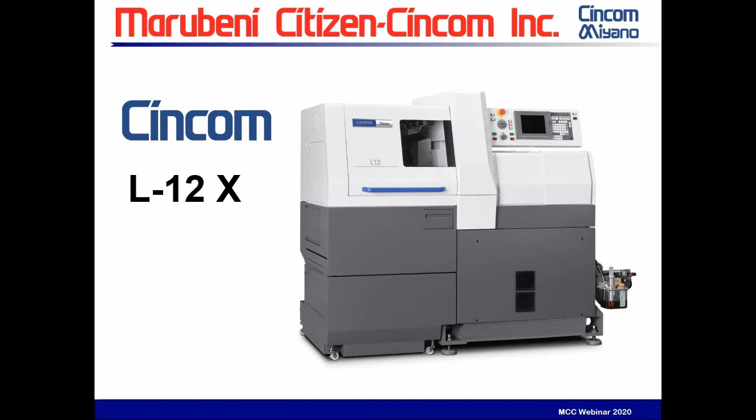We have a new model called the L12 Type X. This is the second iteration of this model. Internally, some of our people call it the L2-12 Type X, since this is the second revision of this model.

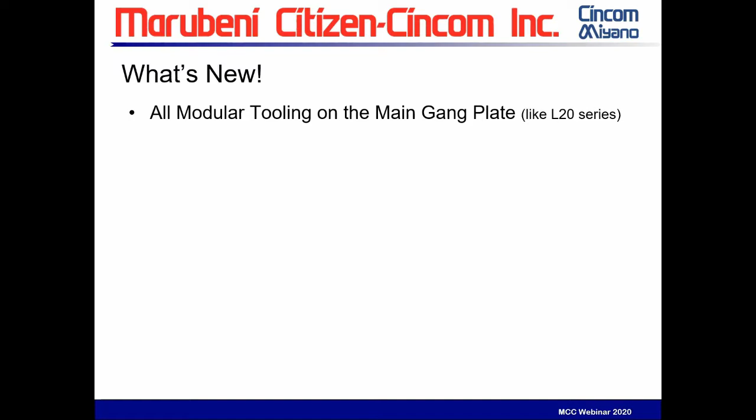So as we look into this specific model, the L12 Type X, what are some of the new things we'll be seeing today on this model?

First of all, it's a more all-modular tooling design, very similar to our L20 series. You'll see that in a lot of examples as we go.

The next major change and improvement is the addition of a Y2 axis. For those who know our products, this is actually mounted on the subspindle side, so the spindle itself moves up and down in the Y-axis. This gives us the ability for small diameter parts—a lot of customers use our L12 series for 30, 40 thousandths diameter parts, even 20 thousandths diameter parts—and we want the subspindle not just good, but perfect, maybe a tenth centered. Since we have a Y-axis, that's easy to do.

Also, the big advantage of the Y2 axis is our back tooling stations get doubled. So instead of 4 tools, we have 8 tools in the back, and we're going to show you many variances of that.

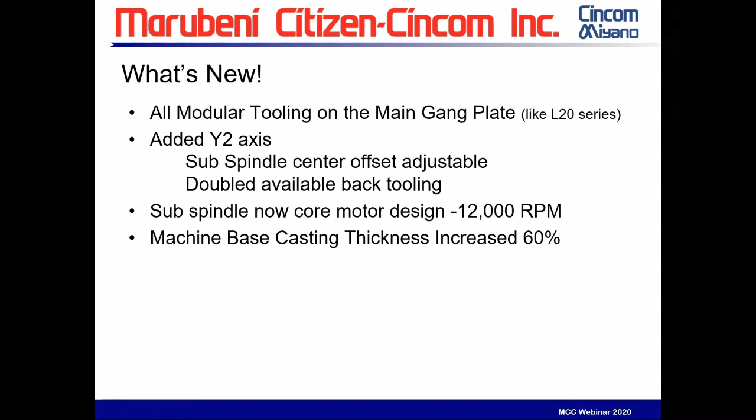On this model, there's also a newer design subspindle. It's a core motor, no belt, and it goes 12,000 RPM, a little increase from the previous model. A huge design concept is the main casting—the machine base casting is much improved, not only to hold the Y2 axis, but for overall rigidity, increased as much as 60%. We're going to show you some of this.

For those of you who have seen some of our newer products, we're always trying to make it more user-friendly. The nice door opening up gives much more room for the operator, and we really like this.

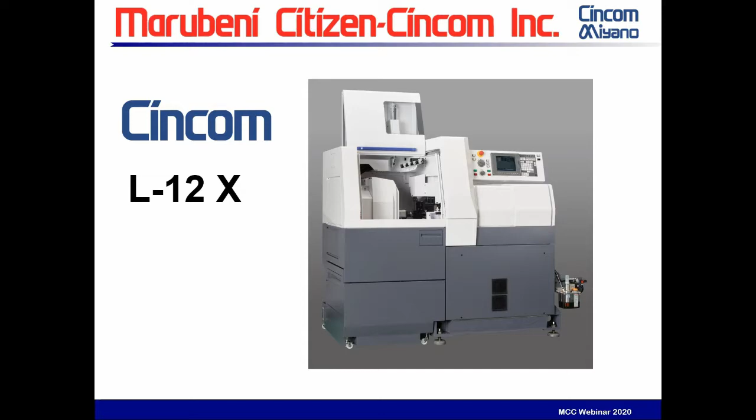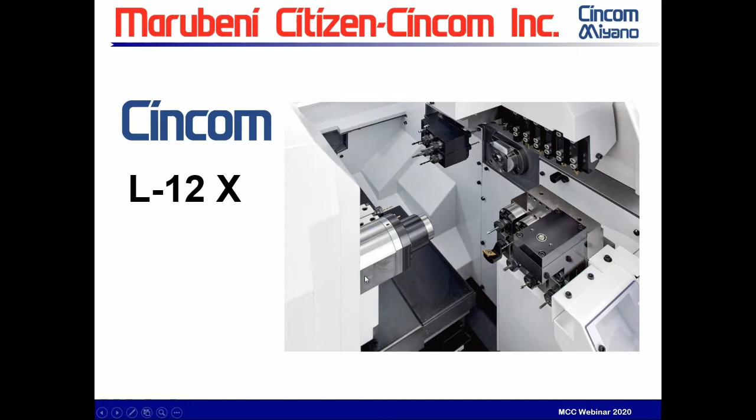So as we look at this more today, we're going to go look inside the machine. Here you can see a lot of our modular tooling we'll be covering in a minute. Here's our double stations of back working tools—there's two rows, a static row and a live row. And here's our subspindle, with the Y-axis right here. We're going to see this in a second.

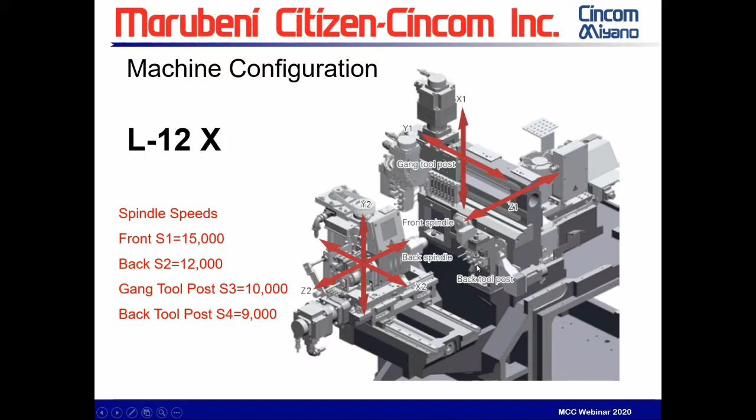The added Y2 axis is right here. Again, this gives us the ability for a perfect center when we come in and get the part from the main spindle. But it also gives us the ability to come over and work on these tool blocks, up and down and all around, with many tool options available.

If we look at regular spindle speeds: 15,000 RPM on the main, 12,000 RPM on the subspindle. We have 10,000 RPM on our gang tool live tooling for the main side, and 9,000 RPM on our back working block. We also have speeders that can plug in, 4-time speeders, some with a maximum of about 30,000 RPM. With electric air spindles, we can get up to 80,000 RPM. So many options for you.

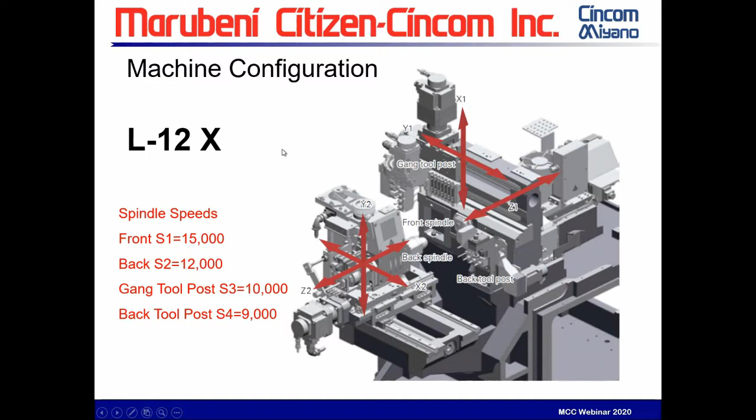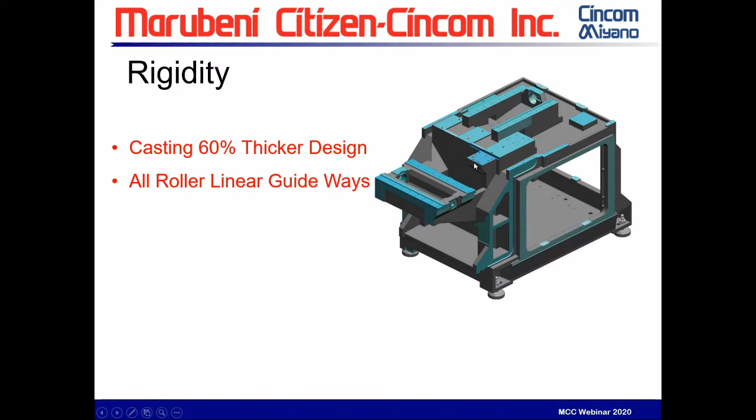Just a quick review of the rigidity increase—60% thicker casting everywhere around. And utilizing that, if you know linear guide rails throughout the machine, this machine incorporates the roller style. This picture represents it well.

Instead of a set of balls reciprocating through—if it was a set of balls, you have one point of contact on the way surface on the top and bottom, times 4. But with a roller design, you have like a 5 millimeter point of contact, times 4, much more rigid with the roller. This specific machine has roller ways throughout all axes. Just good to know.

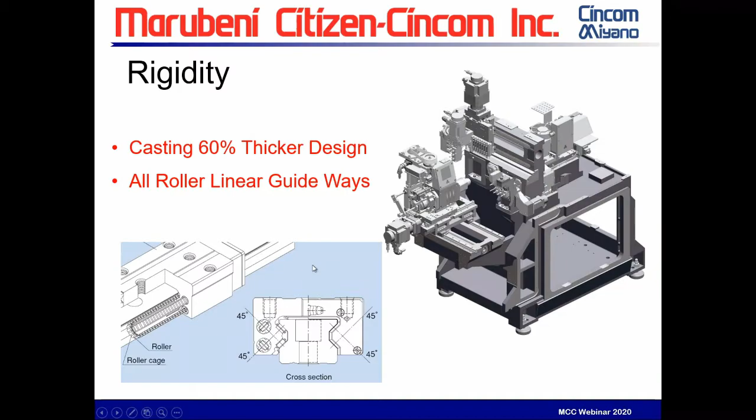If we look at some of the differences, one of the main differences is the modular tooling design. This comes from our very popular L20 series. In the first iteration of the L12, we kept it simpler, where you didn't have lots of tooling options. Now we're full blown into the L20, with many, many options available.

So if we just take a quick look, we now have 1/2-inch tooling available. This picture shows 7 - we offer 6 turning tools that are 1/2-inch, and this picture is actually 3/8 tools. So our standard is 1/2-inch.

We have one live spindle that's built in, but it's closer to the guide bushing with a smaller collet for any special work you need on small diameter parts. Otherwise, we have modular tooling stations and an adjustable tool station.

Like the L series, we have the ability to go from 0 to 90 and anywhere in between, and we have simple G-code software that lets us program parts at an angle if needed. This is going to be fixed at the angle you choose - the angle is not programmable. You set the tool, then you run. But we have all of this as standard on this new model.

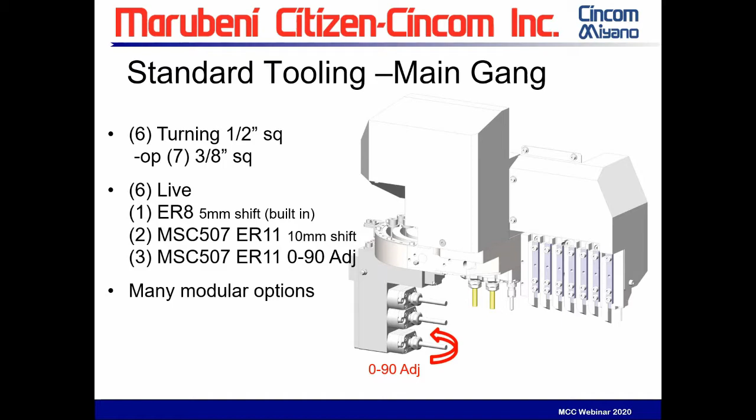If we go a little bit further and look at the tooling on the rest of the machine, next to the subspindle is what we might call deep hole drilling - 2 static stations, these are not live. And this is the Y2 axis, so these are perfectly adjustable through programming. These are 3/4 round, and we have all different sleeve options available here.

We call these the T20 stations, those of you that know our system. On the back side now, a little bit of a blow up, we have 8 stations. The bottom row is static and the upper row is live, and we're going to show you the many options in a moment.

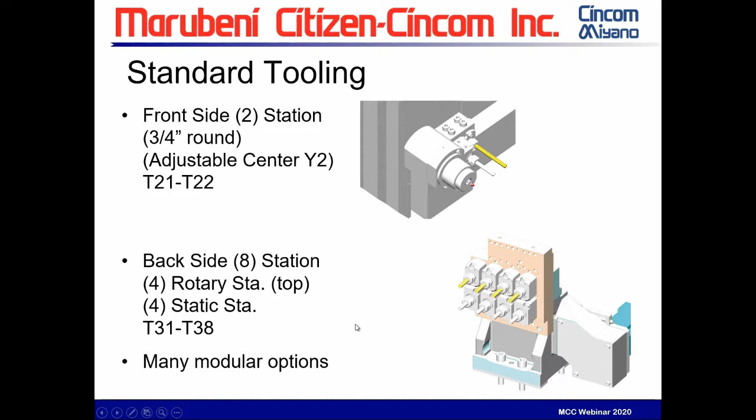So what you get standard from MCC with the purchase - as Citizen has done this for some time now - we virtually have 2 styles of live spindle: the smaller, the 16 millimeter and 12, and the larger 20 and 32. This modular live tool can unbolt, and we can put it in the back here. We can take any of these and put them here.

So we give you 7 live spindles. If you did this picture standard, you might have these 2 modular and these 3, so you might have 5 and 2 here, so these stations would be empty. But now if a different job comes that you need it in the back and you don't need them all in the front, you can take them from here and just put them in the back. So these are all movable, modular.

And if you did get a 3-time speeder or a 4-time speeder, it can fit in all these different stations. It's a fantastic system. We also give you 7 of those tools. Now we also give you 8 sleeve adapters - these are the bottom row here that are holding drill sleeves, and we give you 8 drill sleeves.

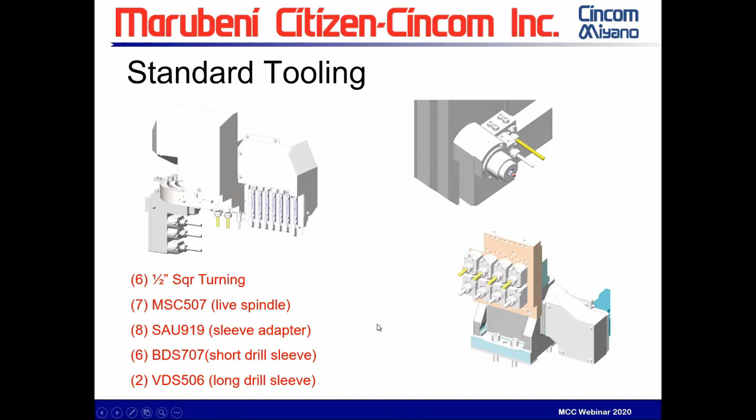So if you had a different job that didn't need all the live, we give you enough to have 8 static tools here, or you can take these same sleeves and put them here. So you can move them all around, but we give you 8 static stations available. So the standard machine gives you much tooling, and of course, we have the ability to do more.

So now what else do you desire? In this case, this is the block we just talked about, but here's an addition. We have an additional block that will give you 3 front and 3 back and a 0 to 30 degree angle. So now we have the ability to have 3 angle tools here and 3 more set at another angle. Very creative.

If we opt out of that, we can put in its place a 3-position fixed straight live, 3 front, 3 back, not adjustable. But if we put that block in and use the creative toolings, use this block set off to the side, fixed, now we have live tooling that can bolt in, and now we have 3, 4, 5, 6, 7 front live, 7 back live, all by just modular tool holders.

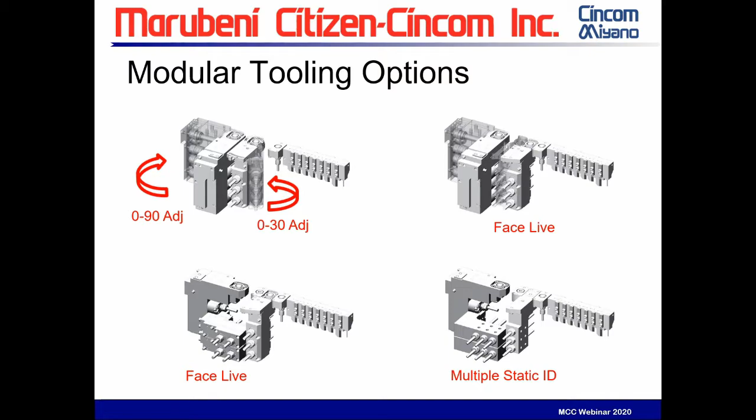If you don't need them all live, we can go here, and here's static tooling. It's the same looking, but these are static. So here's 9 front static with 9 back static. So basically, most any parts you have, we have tooling that can cover your needs.

Now, as time goes on, there's always a need for one more of something, but now we look at the backside. All different modular toolings available for the backside, including cross live or even slotting. We can put these in different stations, anything that you need, and because of the Y2 axis, we're able to hit all these tools.

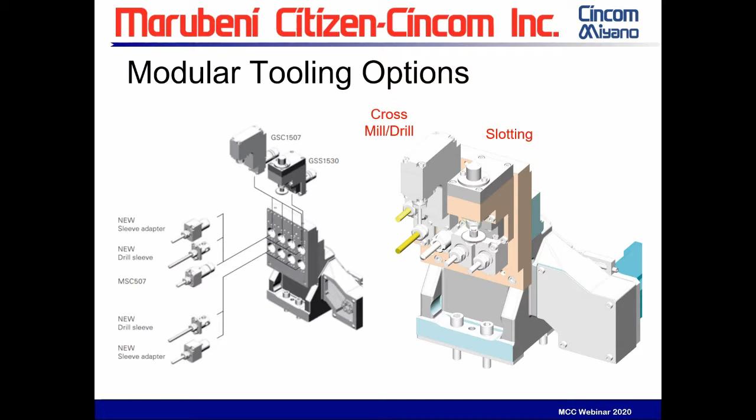Now, if all of that's not enough, sometimes customers have a need for more. Without trying to go to the next machine that might cost a lot more money, we have a lot of customers come to us asking, can you make us a special? So our MCC design special tooling from Tooling and Accessories.

We had a customer who needed this, and we found that if the bottom row is static and the upper row is live, we could design a tandem block. It's powered with the live spindle, and there's gearing inside, not a belt, so when this one spins forward, this one also spins forward, and we can double the live tooling. This is just one idea of a special that we made, and it's now a standard.

This was made for our L20, but it actually fits the L12 as well. So basically, if you need any special tooling, please talk to our people, we can make it. If you'd like to see some of the other things we've done, not everything but some, go to our website, marucit.com, and off the top menu hit Products, then Accessories and Tooling, and you can download a catalog of all our different specials.

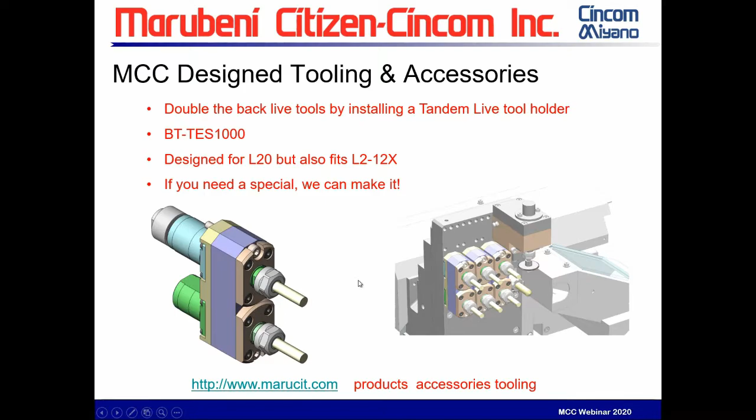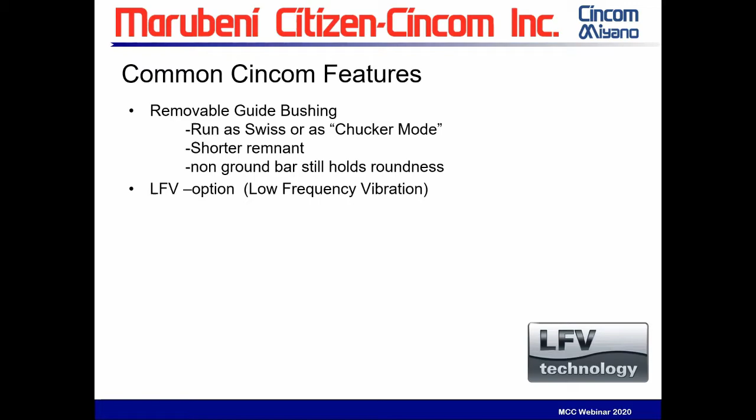So if we look at the next things about this new model, really these next features are all common to all of our new Cincom products. All of our machines now offer removable guide bushing. The L12 Type X is the same; we can run it as a Swiss or as chucker mode.

Now, I don't like to use the word chucker mode. I would say non-guide bushing, because we don't typically hand load, but the industry has taken the name chucker mode, so I put it in here.

But what do you get when you run non-guide bushing? Well, you can get a shorter remnant, and you don't need ground bars to hold roundness. We're going to turn and machine as round as the spindle bearings are. On a Swiss, depending on how tight you tighten the guide bushing and the properties of the material in it, you have the ability to have some error in roundness. So when you run non-ground bar in chucker mode, we have the best roundness available.

We also have LFV available for all of our equipment now. It is an option, but we have it available. We have air purge for spindles, guide bushing, and live tooling. So we put positive air pressure into all spindle systems to keep any contaminants and possibly water-soluble coolant out.

We also have, I think more and more people are learning about this, a 16 millimeter upgrade kit, so we can oversize the 12 millimeter to 16 millimeter. A lot of you might say, well, I don't need that. But there's actually some need, since some people really like third-party tooling systems. One of them is a Masa chuck system, and they don't make that in the smaller series machine. So if we buy this 16 millimeter upgrade system, then we can hold the Masa system in our L12.

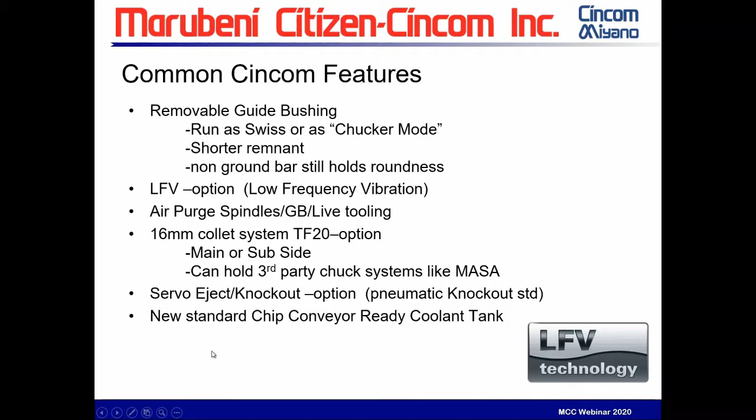We also have some changes to the chip conveyor coolant tank, not the chip conveyor itself, but the coolant tank that we supply with the machine. Any of our newer models, this is, say for example, normal. But what we do is pre-purchase and set up for the United States the ability to be ready for a chip conveyor. In the past, if customers had to purchase a chip conveyor, we had to take out the coolant tank, basically throw it away and bring in a new one, and you're paying for it again. Now the coolant tank is standard.

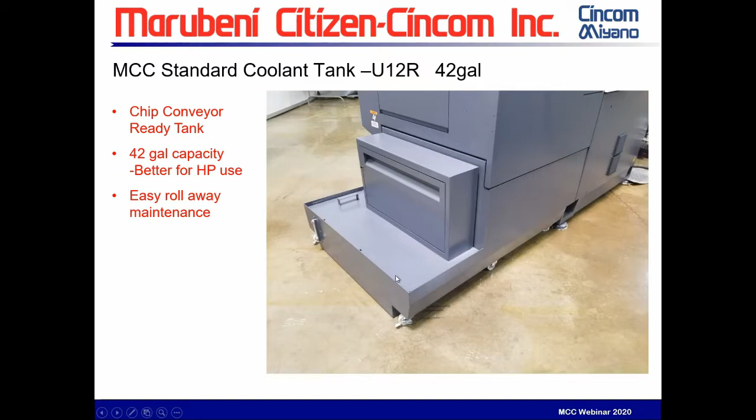The added benefit that many of our users desire is to get more coolant capacity for thermal purposes and for high pressure use, so the oil can get the air out before we pump it again. For aeration issues, the more oil, the better. So this is our standard coolant tank. It's actually 42 gallons on this little 12 millimeter model, easy to roll in and out, and just a standard feature.

We have whole presentations on LFV, low frequency vibration. Ask your dealer and they can get you links to some of our presentations we've already done. In short, our low frequency vibration is a fantastic feature for chip breaking. We introduced this in 2014 at IMTS.

There are 3 different modes of use, one of them being even for threading. Basically our axis will oscillate in perfect timing with the spindle to make a little air gap and break chips. These charts show how we produce an air gap in perfect timing with the spindle, phasing almost like a threading operation while we're turning.

Some of our competitors have something similar and they have different creative names for it, but this is all patented by Citizen. Not only are we doing this in turning straight, grooving, or facing, but when we're at an angle, we're oscillating at an angle. When we do a radius, we're oscillating on the radius. And when we're doing a thread, we're oscillating on a thread. Nobody else has this 2-axis chip breaking technology.

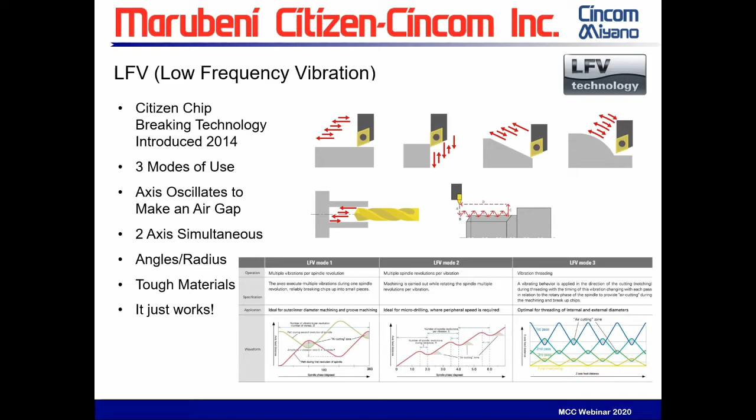So, angles and radiuses, tough materials. A lot of people can't believe how well it does on plastics. Plastics cut easy, but it's always hard to break the chips and get your process under control. LFV is a great solution for this, and the bottom line is it just works. If we take a real quick look - LFV, no LFV, LFV - it gives us a controlled process.

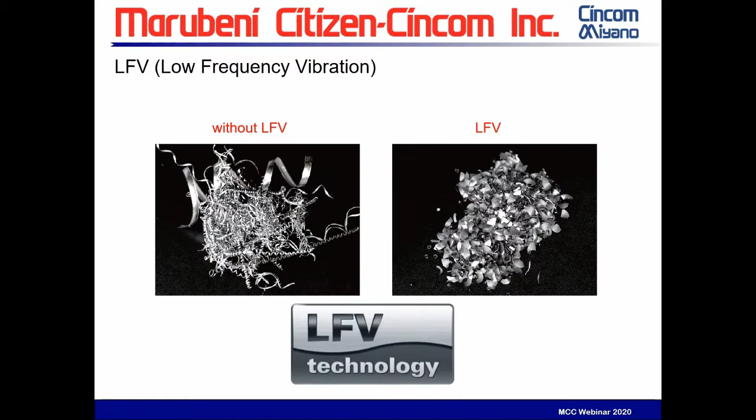Today we're really here to see the L12 Type X, and here we have a video from Citizen that as it goes, I'll explain some of the features.

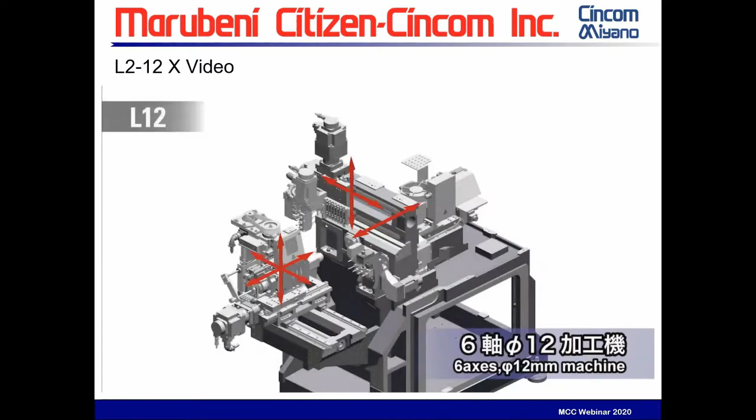So the new L12, the new feature we've already reviewed is the Y2 axis. We added all roller guideways here, things to remember. 60% increase in the casting size.

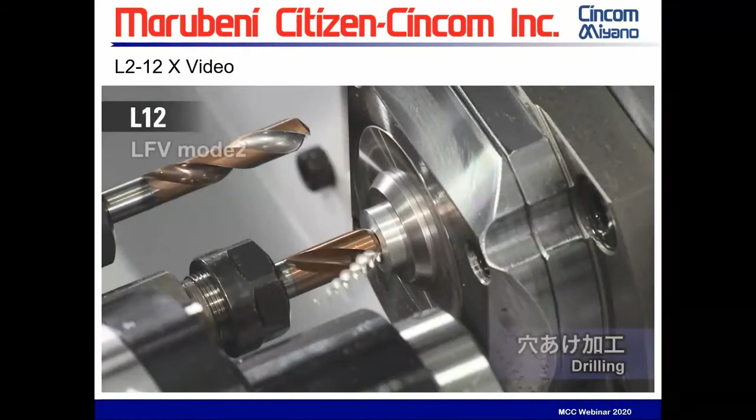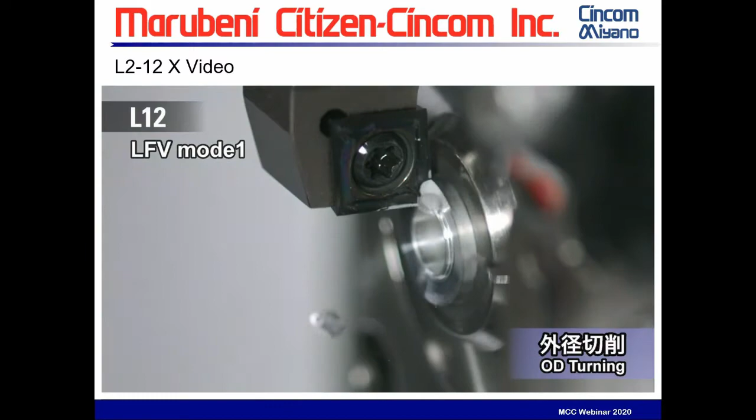Here we're going right into an example, look at that LFV breaking chips, even in aluminum - it's one of the harder ones to break chips when you do heavy cuts. Look at the depth of cut here, and LFV just working away, breaking chips, making a good process to keep it under control. Any machine can cut aluminum, but when it all wraps around and other tools take away all the coolant, or when the subspindle comes in or other processes come in to hit all the chips, having full control with LFV matters.

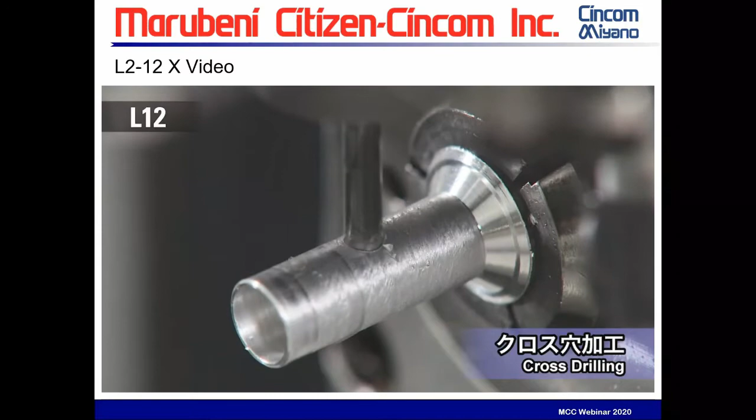This example is also showing an optional feature of 3D chamfering. Here they have these toolings set at an angle, as we explained you could do, and they're drilling and tapping at an angle.

As LFV mode continues, of course X-axis mode 1, multiple oscillations per revolution. Look at those chips breaking in an X-axis motion. Just a wonderful technology that Citizen has provided for us.

In their process they're not running coolant, so they're a little bit slow. The Japanese videos are typically a little slower, but by all means we can run faster. It's all whatever you need for your tooling and your materials.

Another great look at LFV - you can see how stringy that would have been otherwise.

For regular milling, we have direct axis, C-axis, so we don't have to stop and go home. We'll show you that a little bit more in a second on the Cincom features.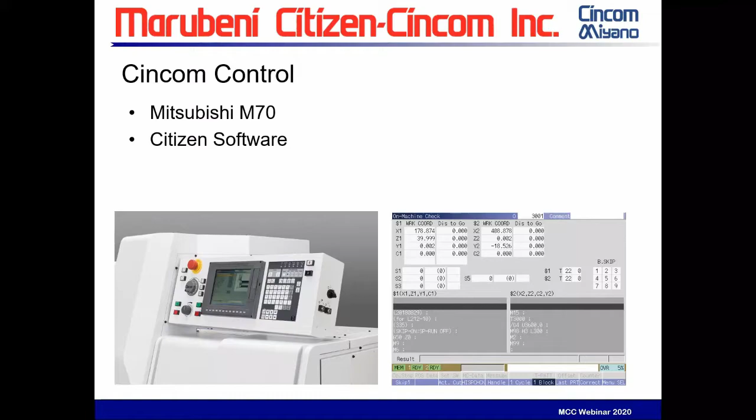As we go and see a machine run and some of its capabilities, we have to take a minute and talk about Cincom control. This is unique to Citizen. We use a Mitsubishi control. Some others do, but whether it's Fanuc or Mitsubishi, I'd say high 90s percent of it is basically all Citizen software running on all of our machines. This gives us the ability to do whatever we want.

Many years ago, our first control was actually a Yasnac L16 — I'm talking the 80s, aging myself, but it was so revolutionary that it was different. What we found is if we stick with one big control builder, once they come up with a new option, all the competitors have it too, and there's no real separation. By making our own software, we have 100% Citizen technology, plus added features like LFV and others. On the L12 control specifically, we have USB standard, SD card standard, Ethernet file I/O, and RS-232, all standard. For huge programs, we're able to run directly off the SD card, and it's easy to do.

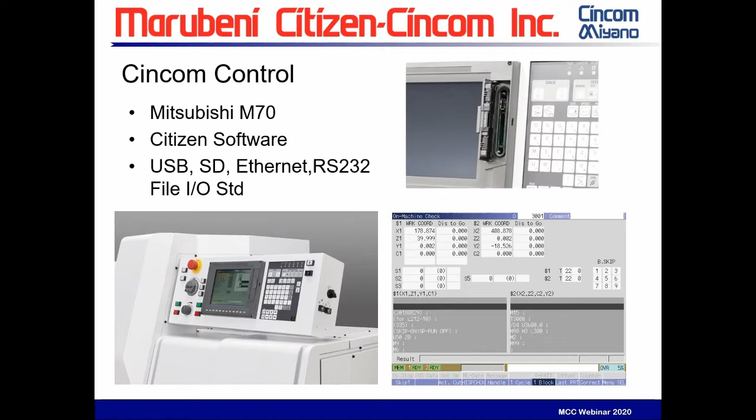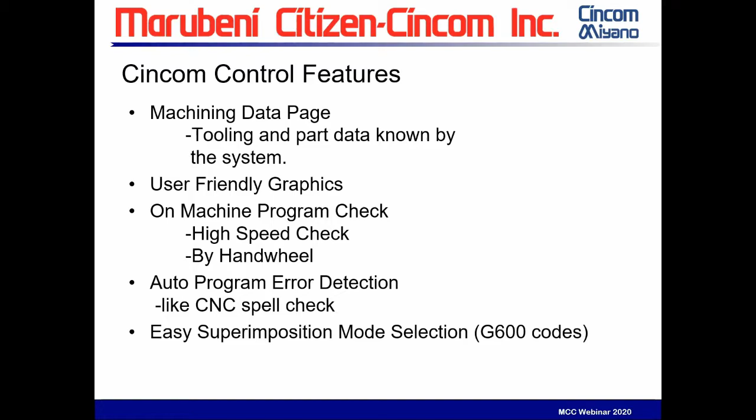Looking more into Cincom control features, there's the ability to have machining data — information about the part so that when the machine runs, it knows things, like the stock size. If we set tooling on a gang plate, in a perfect world all tools are set evenly, but often some tools stick down lower than others. On Cincom, it knows all of this and can actually go up higher for that tool and around it. It knows where the bar stock is. I showed you pictures of drill blocks hanging down — it's smart enough to know that tool holder is in the machine and will go up over it automatically. All the operator is doing is saying T1100, T300. So the adoption of machining data is a key feature of Cincom.

Please work with your salespeople to understand machining data better if you need to.

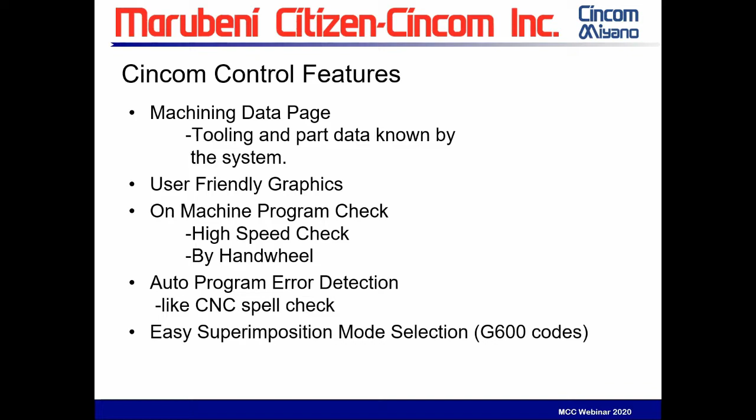User-friendly graphics — Citizen's known for this, and all the screens offer easy choices when operators have to move the machine or edit programs. On-machine program check is a key feature from way back, even in the 80s and 90s, and we're going to show you this in detail with high-speed check and hand wheel running. We also have auto program error detection — it's kind of like a CNC spell check, and we'll show you some of this. We're also very famous and known for our superimposition and our G600 codes. These are all common features of Cincom control.

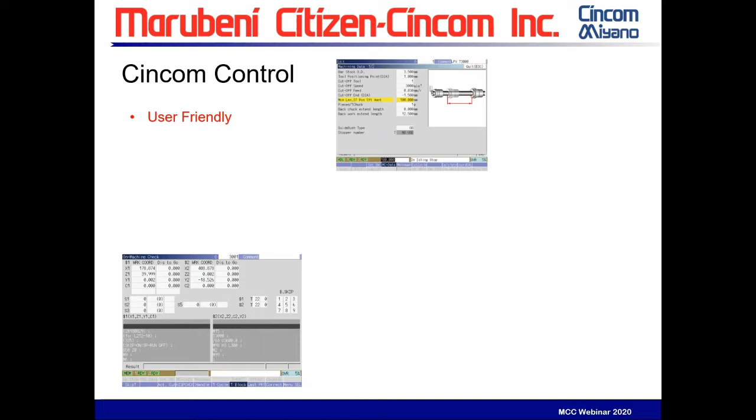Looking a bit more into this — the first is user-friendly. This is a picture of machining data, and as you enter the values, it actually shows you what you're entering as you go. Very simple.

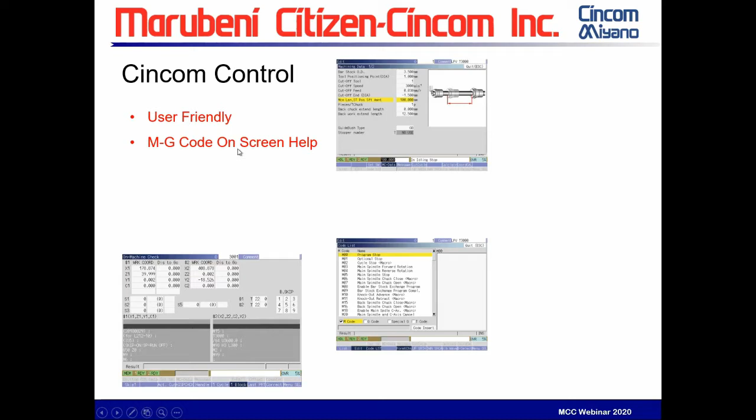As somebody's out at the machine — most people don't program at the machine, but if you're editing and adding something, you might know what the M code or G code is but not remember exactly how to use it or what options it has. Well, right at the machine, we can search the M code or G code, and it will show what options it has and how you're going to utilize that code. You can then paste it into your program with all the basics, and you just fill in the blanks. It's a very good on-screen M&G code help file system.

The L12 Type 7 is so popular and good at what it does, and a lot of people didn't want all the other bells and whistles, that it's not planning on changing and it's not planning on going away. It is the current model, L12 Type 7, and it will continue to be sold and supported.

This new model is an L2-12 Type 10, so there will not be an L2-12 Type 7. It will be the current Type 7 and the Type 10. So that should just answer the question.

This next feature is auto CNC code syntax checking, what I call a spell checker. When somebody is typing codes into the machine and fat-fingers it, or has dyslexia and enters codes backwards, it will instantly turn red for the person entering the code. It's an instant CNC spell checker that warns you—a fantastic standard feature of Cincom Control.

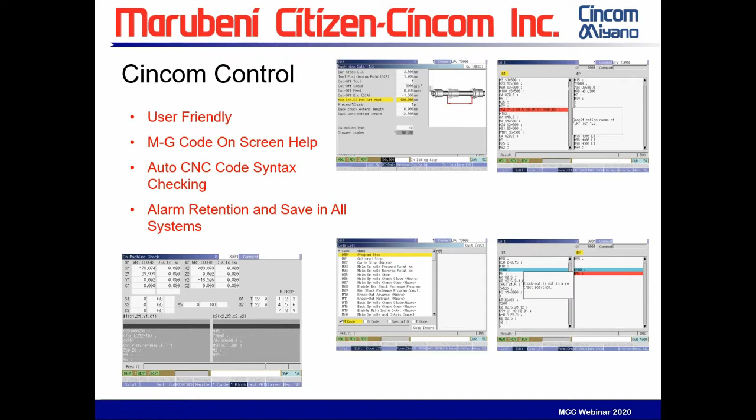When the next person comes in, if you go to edit mode, the screen will actually show you the location of the last errors and what the error was, on both systems. This is very powerful alarm retention and save, helping whoever supports the machine afterward know what happened and where, without having to run three or six minutes just to find the error again—a great feature of Cincom Control.

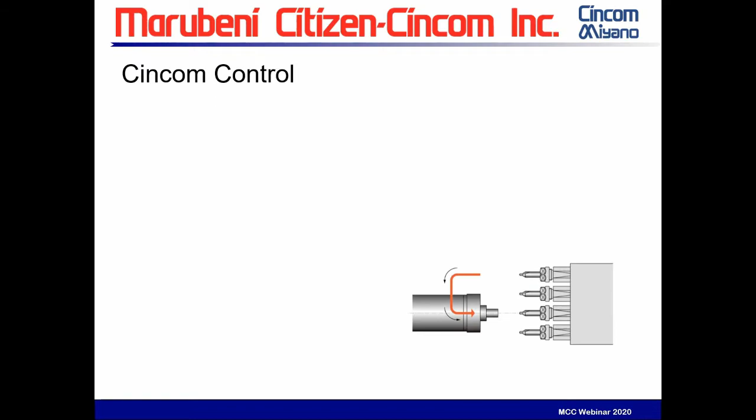These are just some of the many features I'm highlighting. Next, a lot of people don't understand that when we call up a tool or change modes, Citizen works deep inside the system—instead of rapiding back, stopping, rapiding over, stopping, and rapiding in to get the next tool change, it will actually round the corners, away from any cutting, so you won't even see it happen.

What does that do? It makes for a much smoother, less vibrating machine, and it actually gets there faster. It might only save 0.2 or 0.3 seconds, but if every tool change and every motion saves that, and we add up 1 or 2 seconds by the end of the program, we're saving real time.

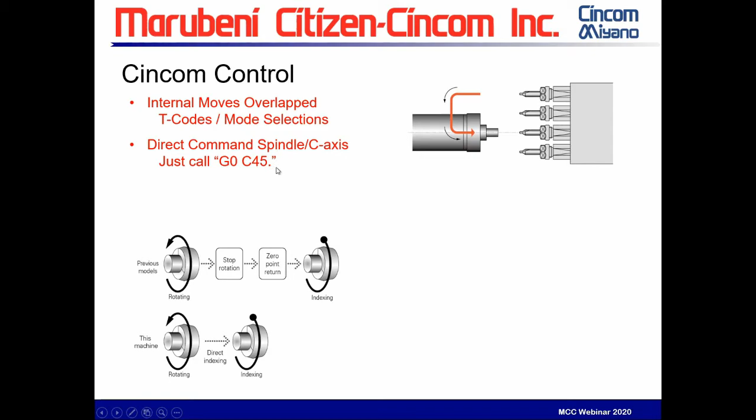The next major thing Citizen has done for a long time is part of Cincom Control: direct spindle C-axis. We can be at 10,000 RPM without stopping the spindle, engaging the C-axis, telling it to go to 0, then to 45 degrees. If we were previously running at 10,000 RPM, our code would simply say G0 C45. This might save 0.4 seconds each time it's used, but since you're running it every day, every job, you're saving a lot of time—some customers run millions of parts, so this could add up to a week's production.

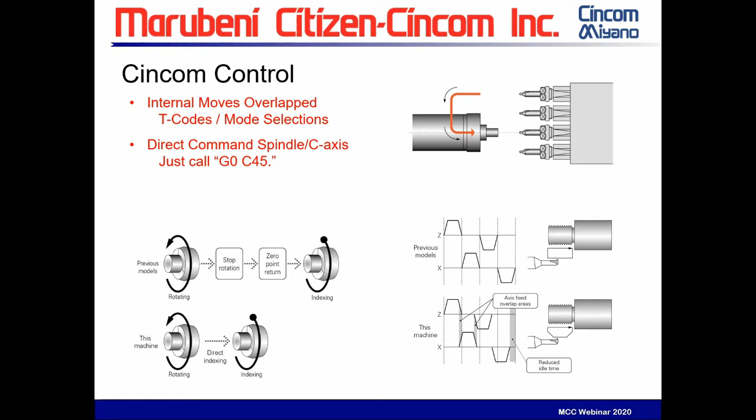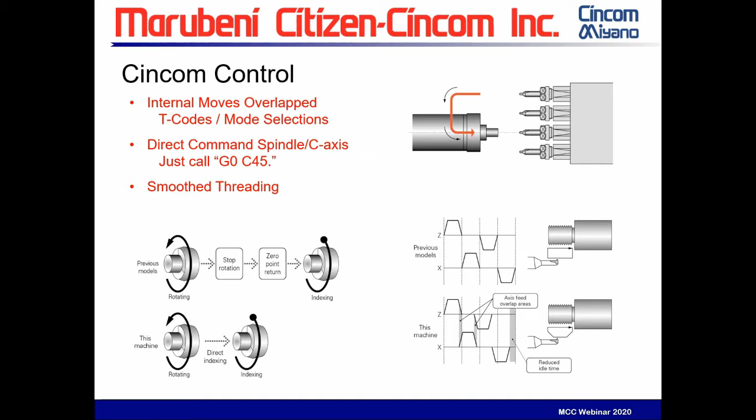The next feature, similar to the tool change motion, is threading. For threading we need a controlled move that has to be perfect, but after the thread is done there's a rapid, and another rapid before threading again—and this rapid stopping in short distances makes machines shake and vibrate. So we round the corners: we keep that perfect thread, but round the corner getting back to it. We call this shock absorber control. It makes for a very smooth thread and saves cycle time—saving 0.1 or 0.2 seconds per threading pass adds up to seconds for the user, which is money in the owner's pocket.

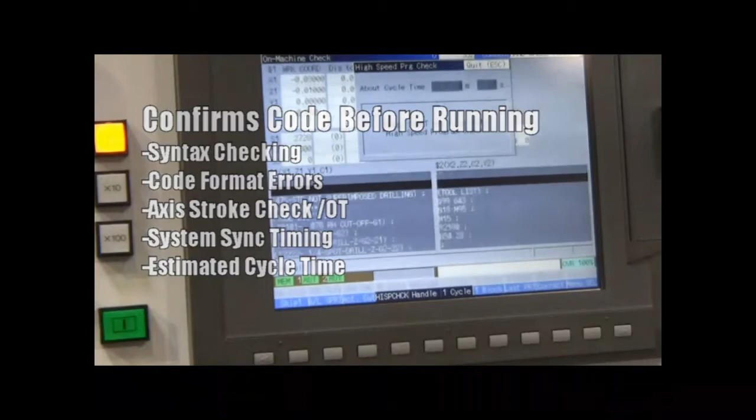Here's the first part, high-speed check. Any program we make, we can just push a button and run it. It gives us a starting cycle time, but it also does syntax checking, code errors, checks for axis over travels and timings. Basically the whole program is reviewed.

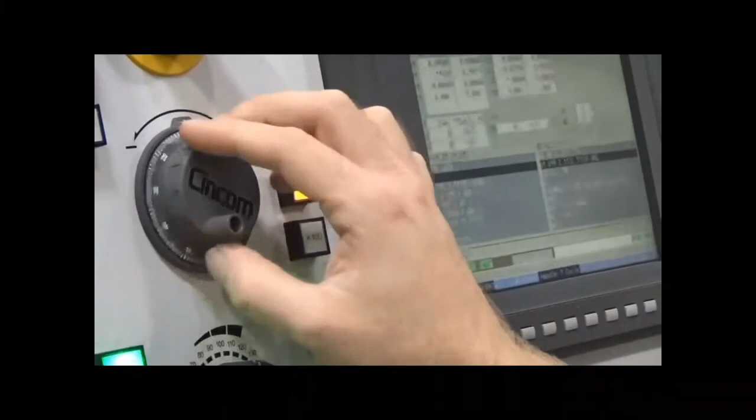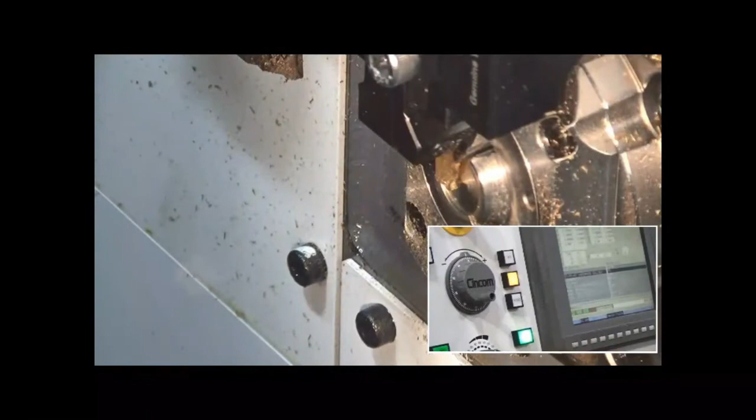Once we pass that check, it doesn't mean it's a good program. You could still have bad code that can crash. So now we have the ability to run the machine at our desired speed. This is an L12 type 10 that we put a superimposition feature in, and we're actually going to center drill and drill as we're turning.

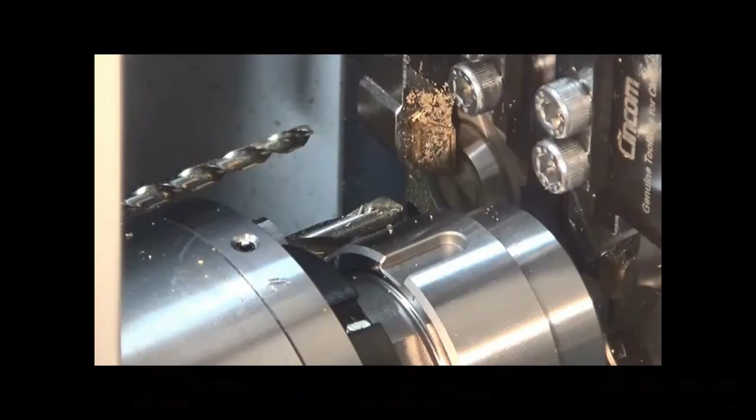The ability for that tool to come in is scary, so look how you can control it. When you need to, you just slow down, and you can bring it in under your control. Our timing isn't perfect on the hand wheel in this video, but you can see the idea.

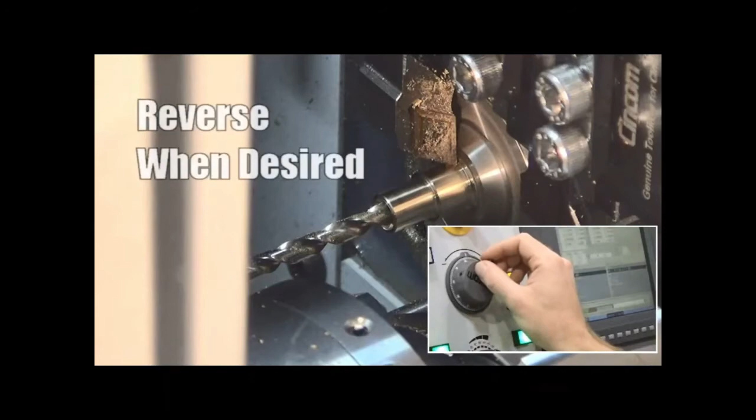We can process to the next tool at my own comfortable speed and continue on. Now if we get somewhere and think, I'm not sure about what's coming next, or I need to check that drill, we can actually run the machine backwards all the way to the previous tool call and then go forward again. Again, live edits anywhere desired in the middle of the program. So that's Cincom Control's on-machine program check.

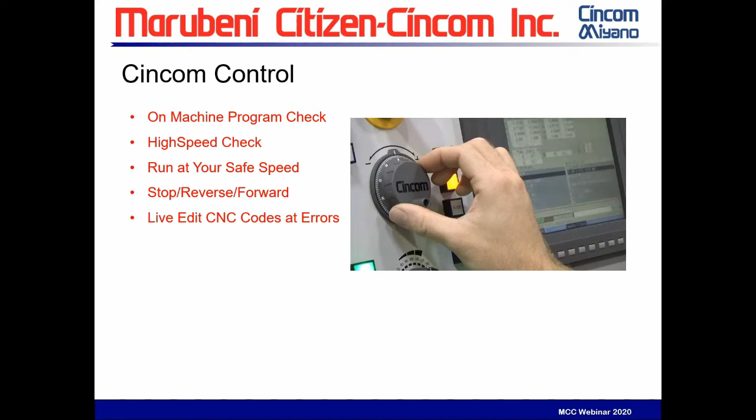I hope we have a lot of customers watching currently. When we talk to customers, unfortunately some operators and programmers get thrown into these systems, maybe coming from other equipment. I would encourage everybody to read the manuals. Not everybody does, and there are lots of people who don't know their machine has this capability. We've had this all the way back into the 90s. So please, if you have other Cincom machines, look it up. You'll really enjoy this feature.

Before I continue on here, Joe, any questions? So far, so good, Brian. Okay, thank you.

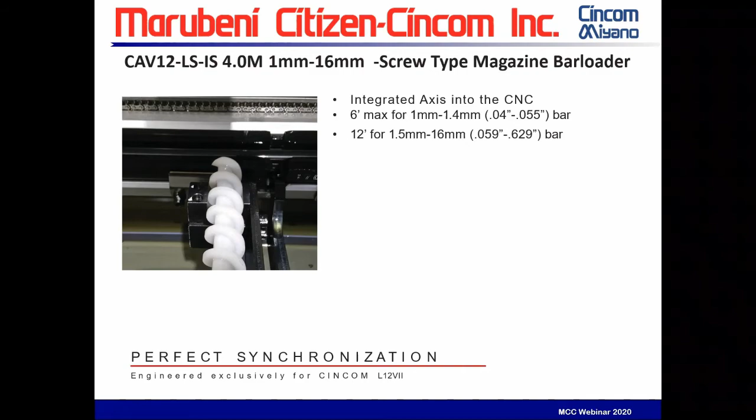As we got past our machine concept and went through Cincom Control, we have all different things to review and all different bar feed possibilities. We offer the CAV12, and with this CAV12, we had more and more customers desire small diameter running with a magazine loader at 1/16th, or even 40 thousandths, 1 millimeter.

Anytime you run smaller bars, typically if you can get them in there, you can be okay and get around it. But the way to get the bar from the magazine into the channel is always the issue with small bar. So we've adopted a screw type system that allows us to perfectly move the bars down the screws. This picture isn't showing them all, but you'd have up to 24 different bars ready, and every time a bar is needed, this rotates one revolution and one bar drops into the channel.

We have a couple different channel sizes. When running smaller stock up to 55 thousandths, 40 to 55, so under 1.5 millimeters, we go to 6-foot bars. But anything larger, 1.5 millimeter and larger, we go to full 12-foot bars. Standard with the machine when we sell it is a 13 millimeter or 1/2 inch, and 7 millimeter, basically a little bit bigger than 1/4 inch.

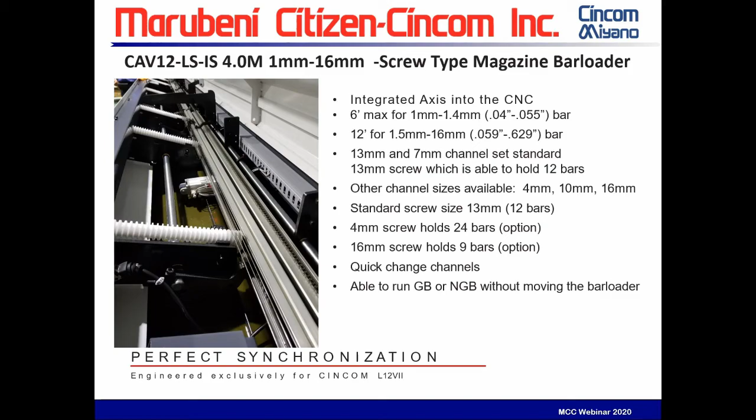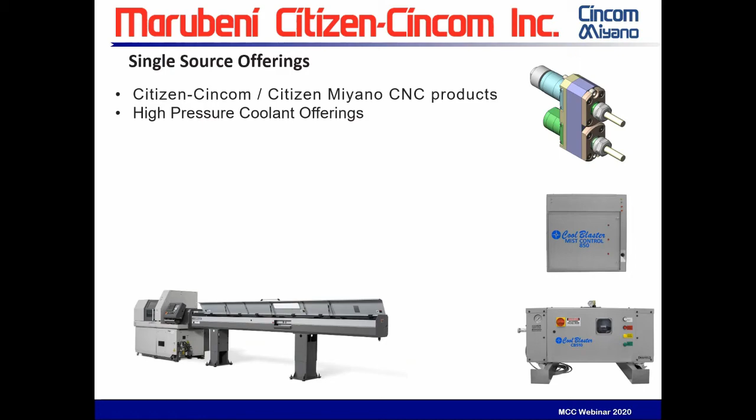To review, all of these things put together, MCC is proud to offer our single source offerings, not only the Citizen-Cincom and Citizen-Miyano products, but our high pressure coolant systems are from us. Here's our high pressure system, and here's our mist collection system.

Tooling and accessories, we showed you many, but we have toolings that are made actually by MCC and sold all over the world. So additional non-standard toolings can be available.

Our automation and loading and unloading department, Mike Watanabe and his team, have the ability to make all different things. We have customers with L12s that have servo parts ejection and tray systems that does all their SPC on little teeny parts and just moves them around in trays to get them to the operator, into cleaning, and into the customer's hands, all controlled. So many automation possibilities, whatever you need.

You have a specific request, we can look at it, we can quote it. This is what we do.

We actually now have incorporated laser cutting into the L series, not into the L20 Type 10 yet, but it can happen in the future. We currently have it in the L12 Type 7 and the L20 series, the L32 series. Laser cutting and laser welding, wonderful features for our machines, all single source offerings, our magazine bar loaders.

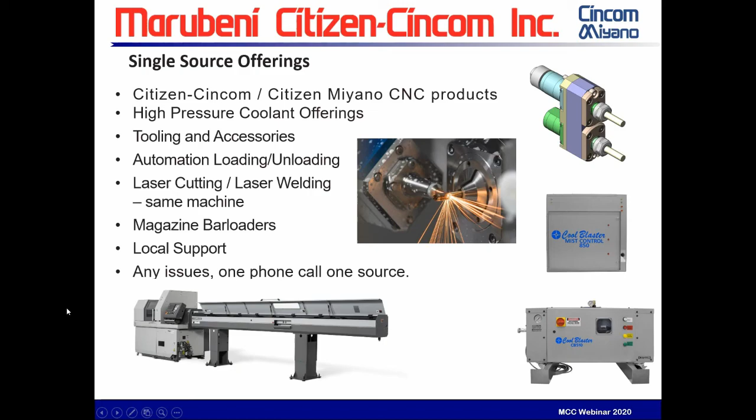And the vast dealer network, again, many local support dealers. Dealers come to our trainings. We have actually different web events just for dealers. So all of our dealers are long-term in the field supporting our products.